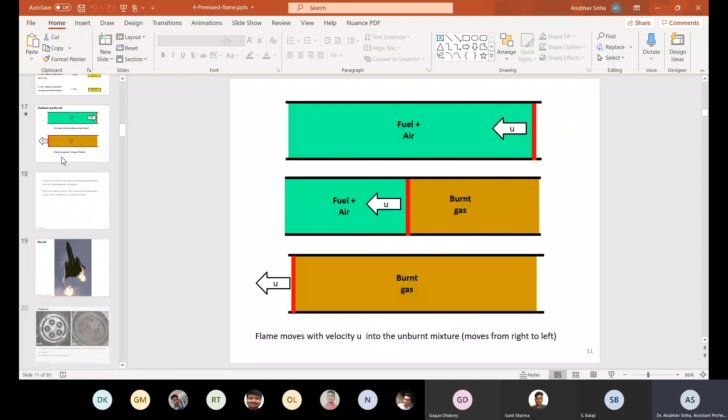Now let us go back to our premix flames. Just to review quickly, we have talked about what is the difference between premix and non-premix diffusion flames. We have looked into some videos, and flame structure I believe you all are clear with, right? Any question?

Laminar flame speed, we discussed Mallard and Le Chatelier's theories. This again I am giving you as an assignment, so if you have any doubt, please let me know.

I will give you an assignment that you derive this equation and write the assumptions. I will mail you all, but if you have any doubt, this is basically to make sure you understand this theory. This is a very important theory for premix flames, so it is more for you to understand. If you have any doubt, you can ask me. But I would like all of you to derive this on paper, and you can just have a look at this. This is what you have to write in your own words, don't just copy it blindly.

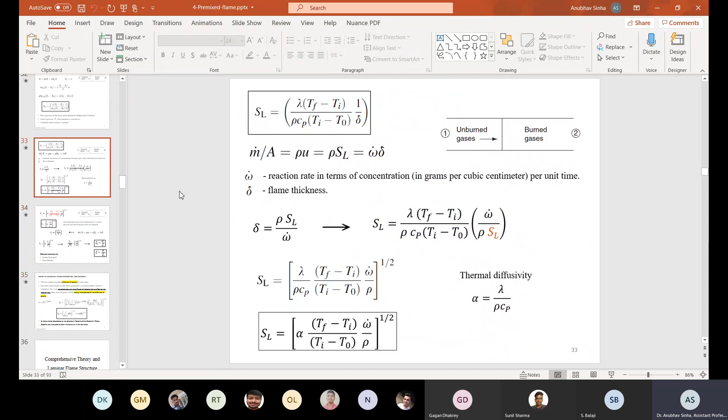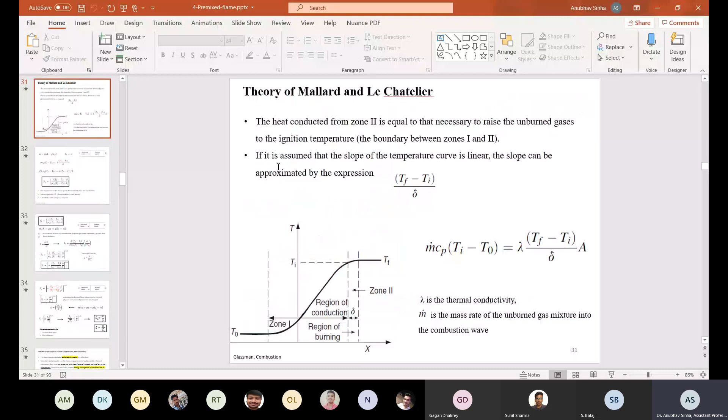So this, and one more collision theory that we have discussed in kinetics, these two I'm giving as assignments. You can take help from this lecture slides, everything is given here. You have to write what you understand. I will again put the instructions clearly when I give the assignment. So why I'm telling this, if you have any doubt, ask now, because you have to write this and submit it. If you don't have any doubt, then wonderful.

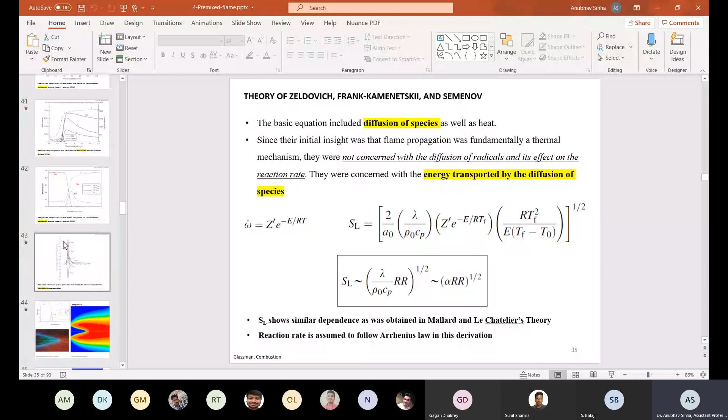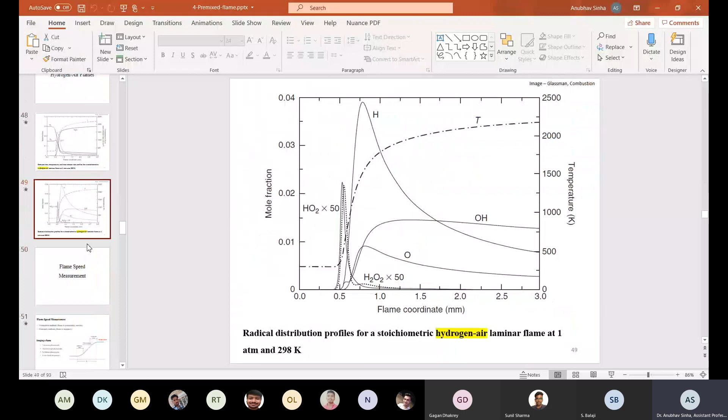We will go ahead. So we talked about flame structures, this all we have discussed, right? How flame looks, where are the major and minor species located, how temperature varies, how species varies. This hopefully you all are clear with. Now let us talk about flame speed measurements.

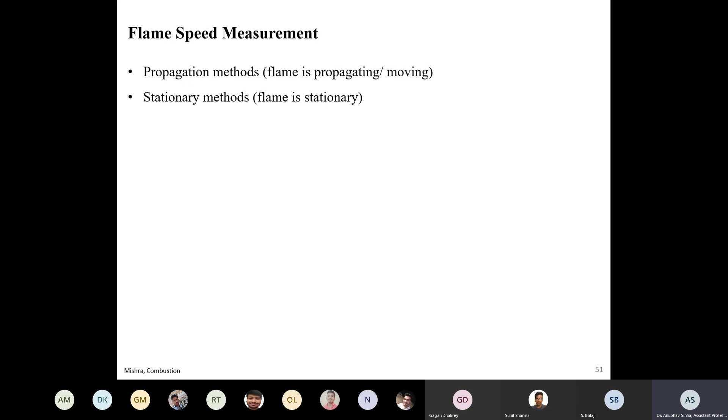Okay, let us then go to flame speed measurement. We have briefly spoken about this already. Now we'll go into a little detail and try to wind this up. So as I told, there are either propagation or stationary methods.

Then we look into how to take an image of the flame. Either you can do a simple luminous photography, where you're trying to capture the flame image using the light it is emitting, like normal photography, or you can take a shadowgraph or Schlieren.

I will talk very briefly about these two, and then there are laser-based diagnostics. We'll not go into detail, but this is a technique you should just be aware of, that we can do some laser-based diagnostics to find chemical species.

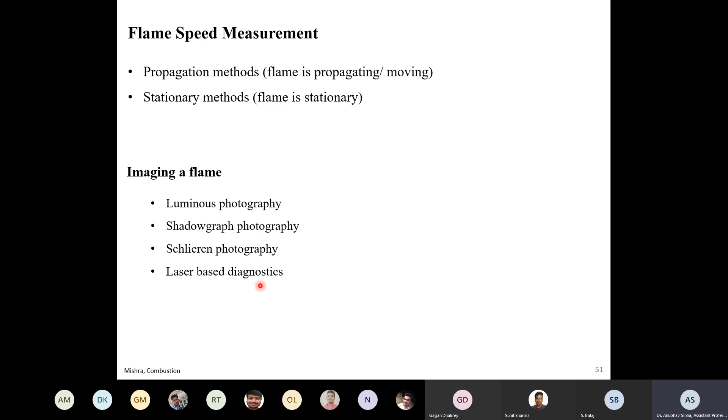But that will not make much of a difference because this flame thickness is roughly of the order of one millimeter or half a millimeter, so they're not very far apart. But since you're studying the subject, you should theoretically know where each part is.

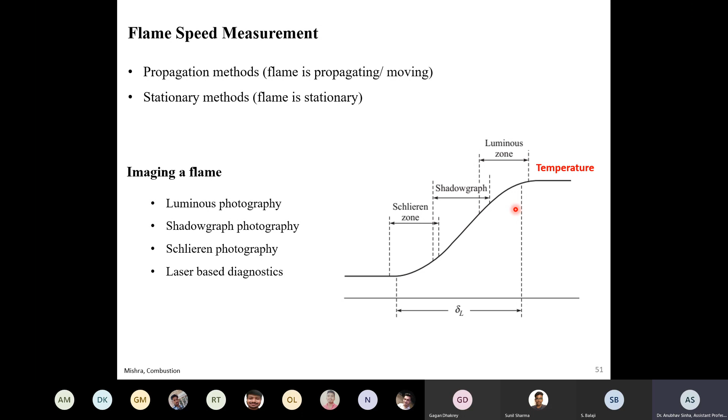Now let us briefly discuss what is this, what do I mean by Schlieren. Basically, in Schlieren or shadowgraphy, let us say you have a test section where you have a gradient change in this direction, a density gradient. So the density of air is changing in the y direction.

Because of that, if you have a light entering this region, it will get bent, either up or down, depending on how your density is varying. This happens because refractive index depends on the density of that medium, and because you have a density gradient, refractive index will also vary and light will bend. You have to study Snell's law, there's a lot of theory behind it—I'm just giving a brief overview.

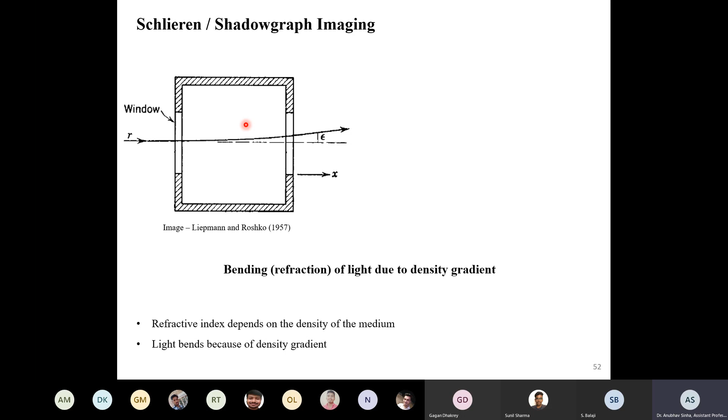What is the Schlieren image? If you want to do this experiment, you can use a simple water setup: water in a beaker or container, with some sugar solution, so the concentration is more at the bottom and less at the top. Because of this density gradient, you can see a laser pointer bending like this. Everyone can see this? Yes, sir. I will not go into the detailed derivation of how the technique works, but this is the brief background.

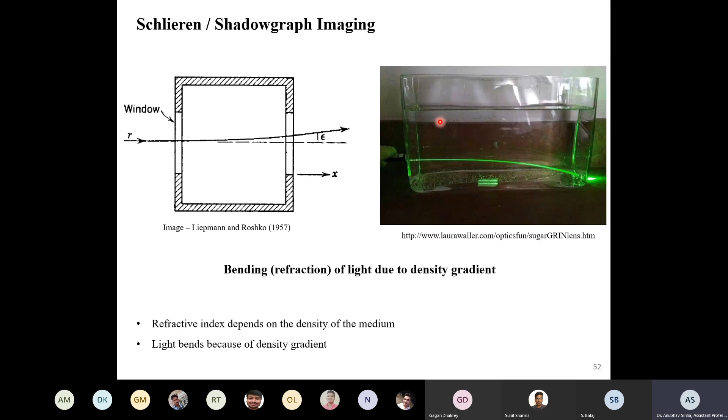This is the physics behind this method: light bends, and we use this bending to obtain Schlieren or shadowgraph imaging. Now, what is the difference? Schlieren basically depends on the gradient of density, the first derivative, whereas shadowgraphy depends on the second derivative, del square. How that affects things we'll not go into detail, but this is just a very brief outline.

And this is how you take the image—this is a Schlieren image. If you are interested to know more about these techniques, you can refer to these sites, go to Wikipedia, or this image I've taken from this website, from the Petersen Group at TAMU.

So what you see here is a spherical vessel, filled with an unburned premixed mixture. These are the igniters. Once you ignite, there is a flame front which grows with time. You capture how, at what rate this is increasing, and then you know what the flame speed is. This is a very good example of Schlieren photography—this is how a Schlieren image looks.

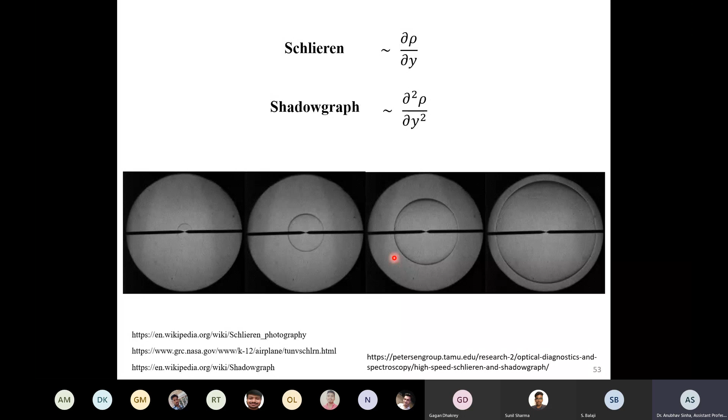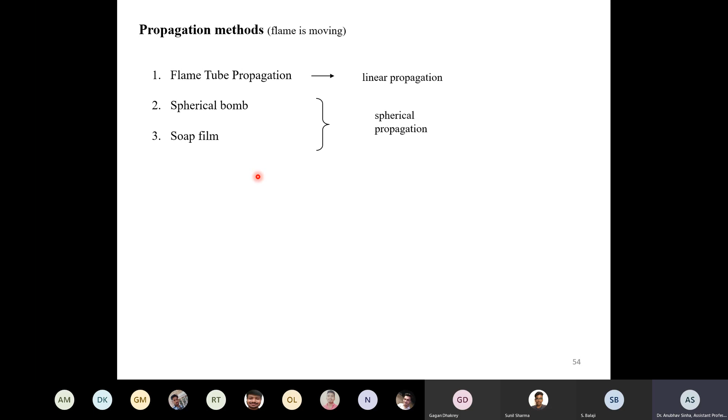Now we'll talk about what we've briefly discussed: flame tube propagation, spherical bomb, and soap film. We'll look into more detail now. Flame tube is, as I told, a linear propagation, and these two are spherical propagation. Can you see the top part, or is it hidden behind this presenting thing?

Can you all see this flame tube propagation? We can see till the heading, sir. Yes, sir, we can see that heading. You can see this part. For my case, one top bar is coming.

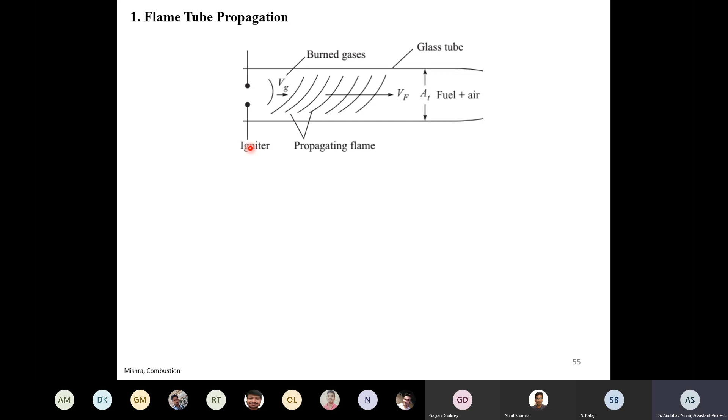Anyway, good. So this is a flame tube that we have already discussed, and I have written some limitations, you can read it. There is no much theory or explanation. Basically, ideally when we talk theoretically, we say that the flame front is a straight line and it moves normal to this direction. But in actual experiment, it gets bent because of various effects. One thing is that the velocity profile is parabolic, then there are some buoyancy effects. So because of all this, it is an approximate technique. This is not a very good method to measure flame speed.

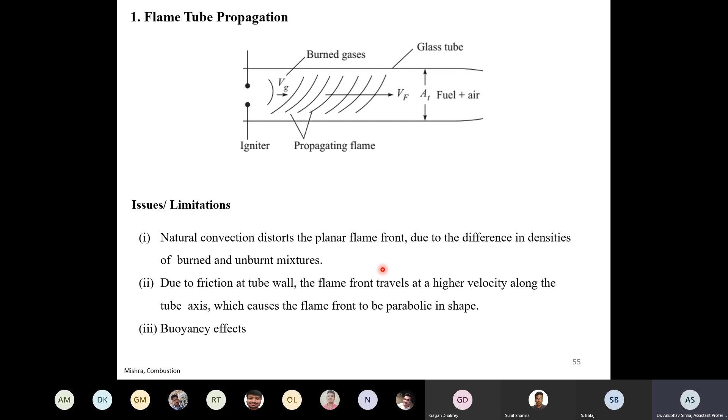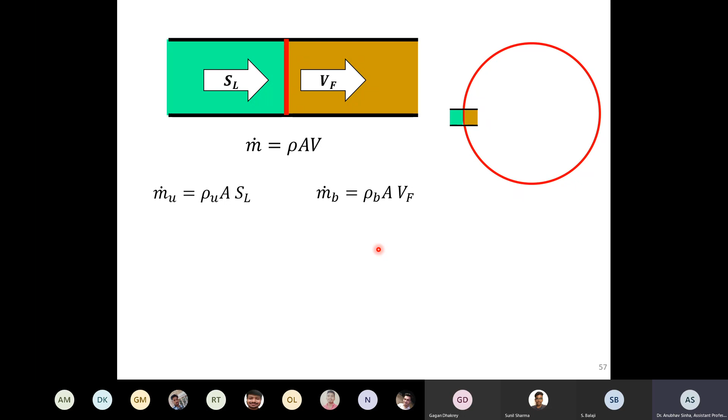So now for this coordinate, when I say that flame is stationary, mass conservation will hold good - mass conservation will be applicable. So I can say m dot is rho a v. Now let us have a look at m dot on the left side. For unburnt mixture, what is coming to the flame, I can say that m dot u is rho unburnt, area of this section, and SL, flame velocity. Whereas for the right hand side, for the burnt mixture, m dot burnt, what is leaving the flame front, is rho burnt, a, v - burnt density and velocity. Now since mass is conserved, what mass is coming to the flame, the same mass is leaving the flame. So I can say m dot u is equal to m dot b, and using that I come to this equation.

Now if I relate these two, I can say that SL can be represented like this. Basically I'm just sending this rho u to that side, A gets cancelled, rho u sent to that side, it will become rho b by rho u into Vf. Is this okay to everyone? Yes sir. Fine. Now this Vf is basically dr by dt - this is the rate at which the flame expands for a stationary observer. If I am standing outside, if I am not moving with the flame speed, then this is the dr by dt. So we can relate the flame speed by using the density ratio and the rate at which the flame front expands for a normal stationary observer. This is the basics of spherical flame expansion.

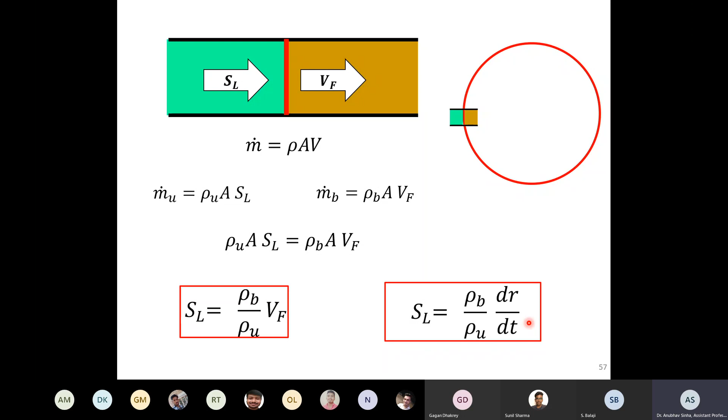So there are some limitations using this method. Pressure and temperature will increase when you have a large flame, when a large area is filled or the flame is going towards the wall. Initially this is good, there is not much increase in temperature and pressure, but initially the flame is distorted, having very large curvature, so that is also not good. So taking this flame speed measurement for very large flame or very small flame is not good. You have to take something in between. So that is one of the limitations of this method.

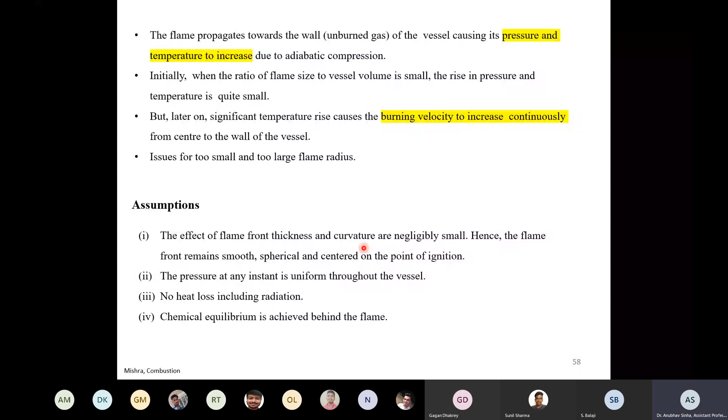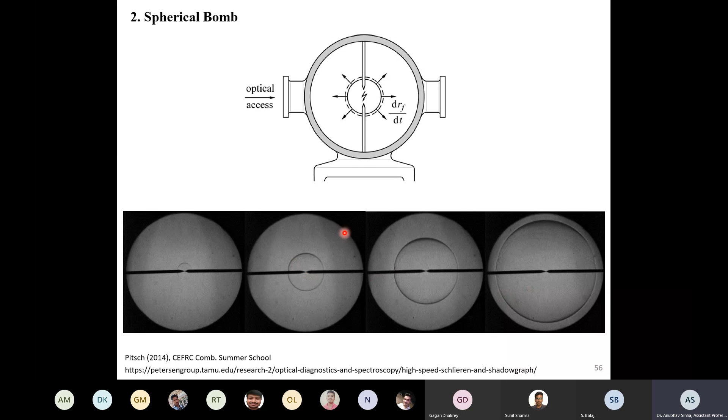Then one big assumption is that the pressure at any instant is uniform. That is in general true, unless you are having a very fast flame or detonation, which we have not studied. But for normal cases, this is a good assumption. Then no heat loss, that is also an assumption you need to be aware of. And you also assume that chemical equilibrium is achieved, which is also a reasonably good assumption.

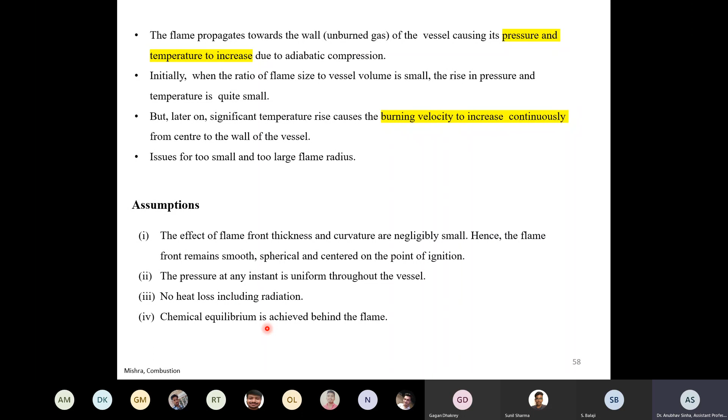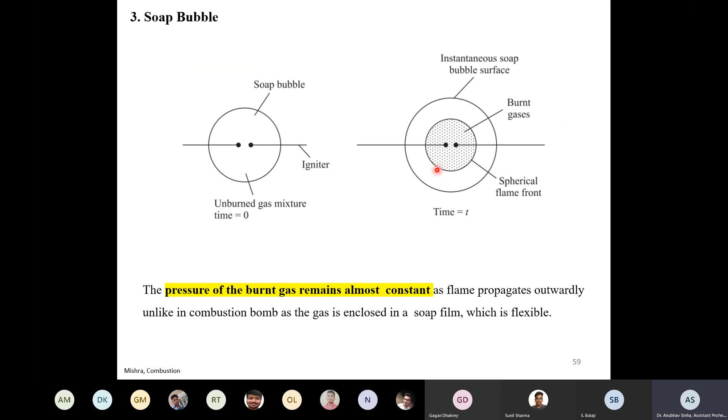So again, a very similar method is the soap bubble method. What happens in the bomb method is that you have a closed vessel and pressure increases with time. Now if you create a soap bubble, then you can maintain the pressure constant. The bubble will expand up to some point and then it will burst. So for a small period we can take flame speed measurement. But this method also has a lot of limitations.

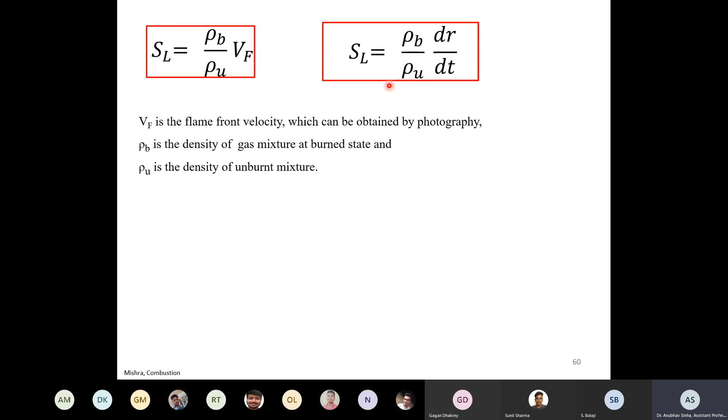So again we will use the same equation what we have used for the spherical bomb to measure the flame speed SL. But the limitation is that first you have to pass the mixture through a water solution, soap solution, so you cannot have a dry mixture, it will always have some moisture. Then when your bubble expands, it may not retain a perfectly spherical shape, it can become ellipsoid or something like that. And if you have a fast flame, the flame front will not be very smooth, so that is another concern with this method.

And heat loss, which is also there for the bomb method, is also an issue here. And again, it is not a simple task to create a bubble, it is a difficult or troublesome task when you want to create a bubble. So this is one method which you know for completion, but it is not a great method to follow.

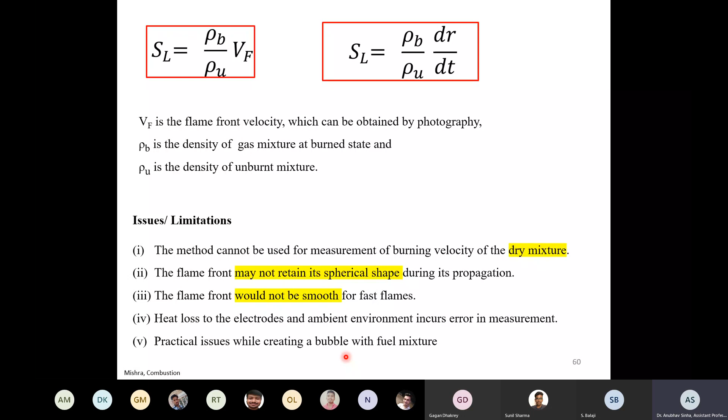So now let us look at stationary methods, which are much more simpler to use, and some, for example, the last one, is much more accurate. So let us have a look.

So one is a flame tube, which we have already discussed. You have a tube and you supply fuel in such a way that your velocity matches the flame speed. In that way we can maintain a stationary flame, and using this velocity I can say that this is my flame velocity, and that is how it can be measured. But again, it will be very difficult to create a stationary, stable and thin flame like this, which is very straight and not distorted. So theoretically it is a good method, but practically it is a little bit tricky and difficult to obtain a very flat flame using this. These are the limitations we have already mentioned.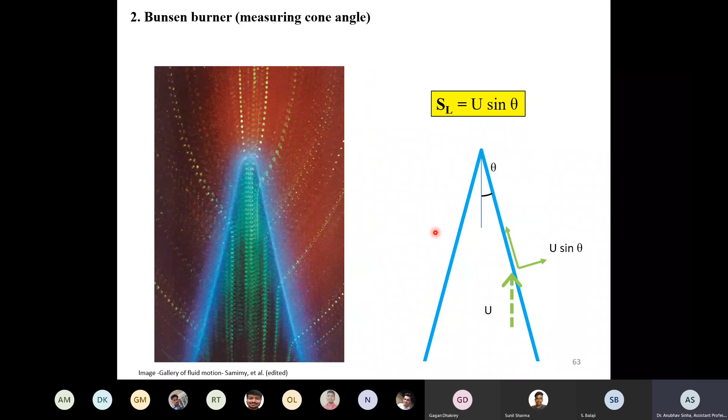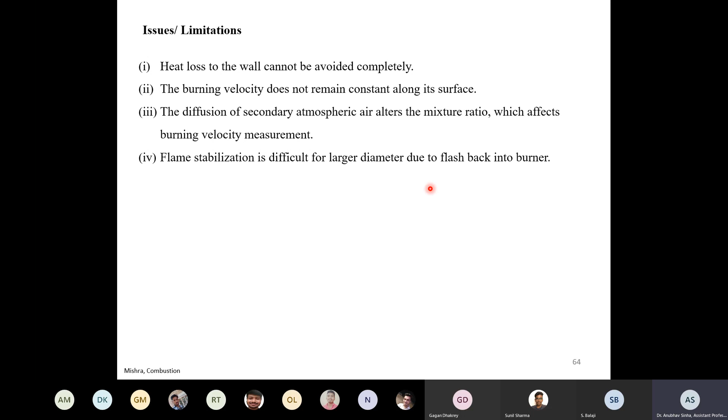Coming to the limitations, heat loss cannot be avoided. We assume burning velocity, but strictly speaking it is not true. For practical cases, this is a good assumption. Large diameter and all this we'll discuss. Flashback we have discussed briefly, but this is another topic, we'll take it maybe next week. So these are some of the issues associated with this Bunsen burner method.

Now let us talk about the last method, flat flame burner. This is one of the most accurate methods which you can use to measure flame speed. What we do here is basically we have a burner like this where we get a flat flame. I will show you photos how we get a flat flame, but this is how it looks.

What we do is we have a sintered metal disc here, and we have fuel air mixture coming from the bottom. This fuel air mixture enters here, and these are some flow conditioning apparatus. We'll have glass beads and steel wool. The function of this is to make the flow uniform, to reduce turbulence, to make very nice and uniform flow. And again the same thing will be done by the sintered disc.

This is a porous metal disc, I will show you some photos. Through this the flow passes. That gives a very flat or uniform velocity profile, because there will be a large delta P across this porous disc, and because of that we get a very nice flat flame here.

Now what we do in this method is we have a metal disc and we apply cooling here. Water tubes are there which cool this disc. Basically we are extracting heat from the flame. What we do is we take different rates of cooling and finally we extrapolate that to zero cooling for adiabatic.

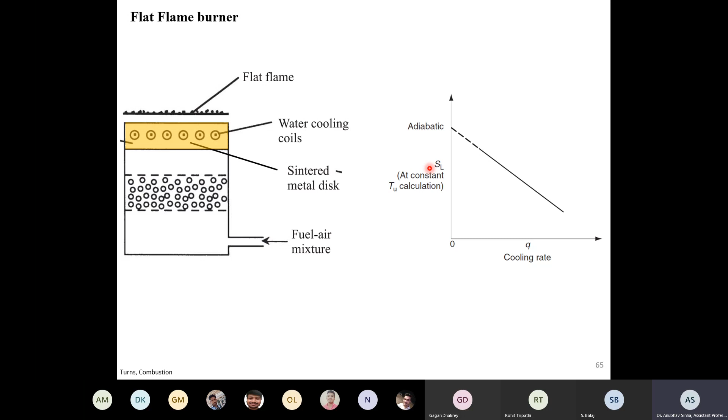Flame speed is basically defined for an adiabatic flame where there is no cooling at all. So we use different cooling methods and then we go back to adiabatic, and this is how we define flame speed measurement SL, for different rates of cooling, and what I already just spoke.

So let us look at the photos. A student asks whether flame speed and cooling rate vary linearly. Yes, that is an assumption, mostly it will be linear. There is actually one very important question that no one is asking, that we'll come to.

Anyway, this is how the actual burner looks. I've taken this from a McKenna burner. They have some copyright on flatflame.com, what you see. You can go to this website to look at more of the designs.

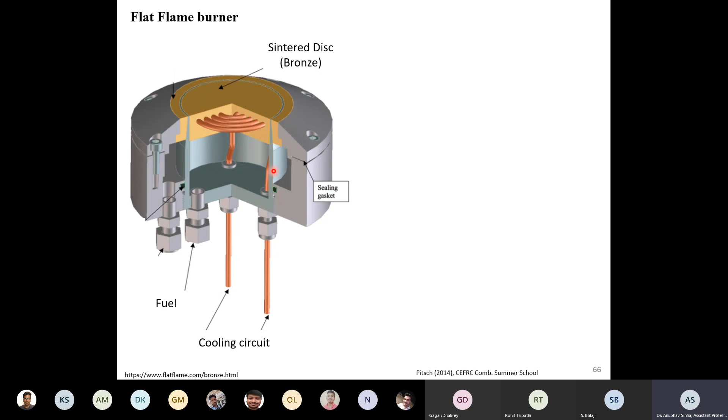So how does it look: this is your sintered metal disc, I have a photo also. This is your metal disc, made of bronze, and it has very small porous holes, maybe of the order of 20 micron, 40 micron. Because of that, there is a large delta P and we get a very nice uniform velocity profile.

These are the tubes you can see inside this, which will pass water. Water enters from one tube and then it is circulated inside it, and then the hot water comes out through another tube. This is your sintered disc, as you can see here. This is your cooling circuit, and here the fuel enters.

Fuel enters from here, and it basically has a slightly higher pressure than atmospheric, and then it diffuses, it just goes out through this porous disc. Let me draw: the fuel comes out like this through this porous disc, and then it forms a flame which looks like this. Can you see, this is a very nice flat flame, and this is one of the most accurate or idealized methods which we utilize for flame speed measurement. And when you go for laser diagnostics, this is a very standard burner used to calibrate your laser instruments.

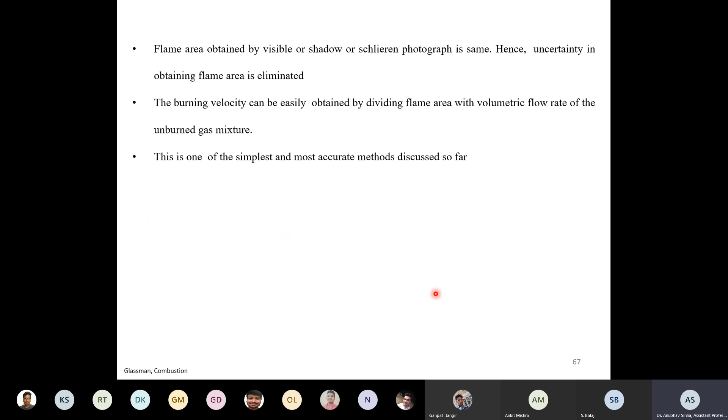And this was actually the last photo I took with that burner. After that, the burner melted. So if you have a porous plug like this, a bronze disc, and if you don't have cooling, this is going to melt after some time.

So that is why cooling is needed. Then why don't we use metals with high melting point? Yes, correct, we can, but that will be more costly. That is the only concern.

So we have adiabatic burners also, like steel burners where we have a steel plug, and there are some other metals also. For those burners we don't need water cooling, that can be eliminated. But this is the most general method.

And with cooling you can actually make it more accurate. Once that burner gets heated up, we don't know what temperature it is, so accuracy is not very good. But if you have cooling, you can accurately extrapolate.

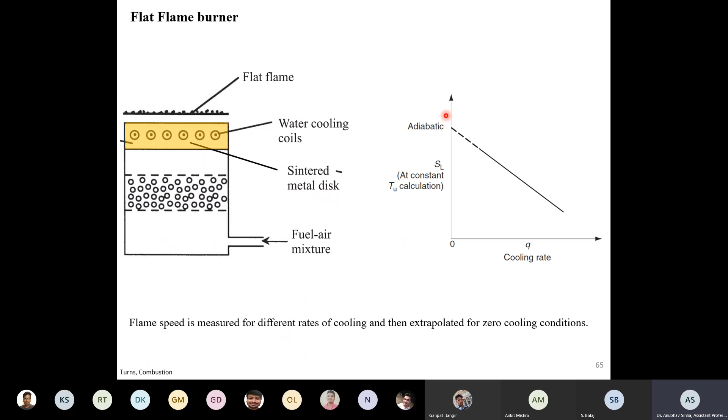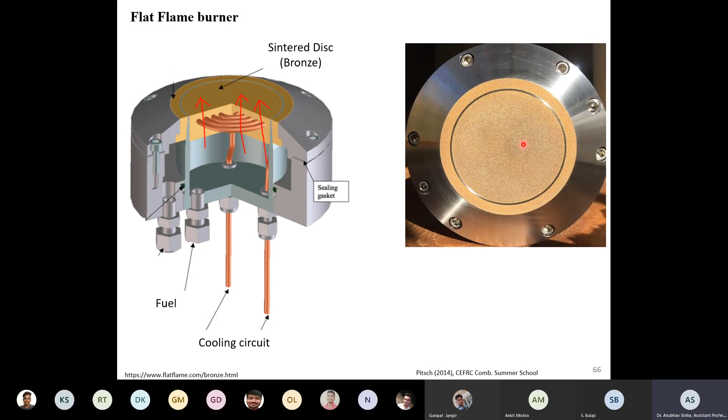That is one point. We have straight tubes instead of porous burners, of different metals, but that does not give a very uniform flame. There are also steel burners sold elsewhere, which should give good results, but they are very costly because sinter disc production is costly. This method is found to be more accurate. By this extrapolation, you get a very accurate flame speed. That is the idea.

Okay, so now let us go to the last part of this chapter. That also we have discussed, we'll just go into more detail. I've added some more plots. So let us see: laminar burning velocity is very important for premixed flames.

And it is difficult to achieve idealized conditions. There are, for example, the last method is the most accurate, so we'll see what are the techniques and...

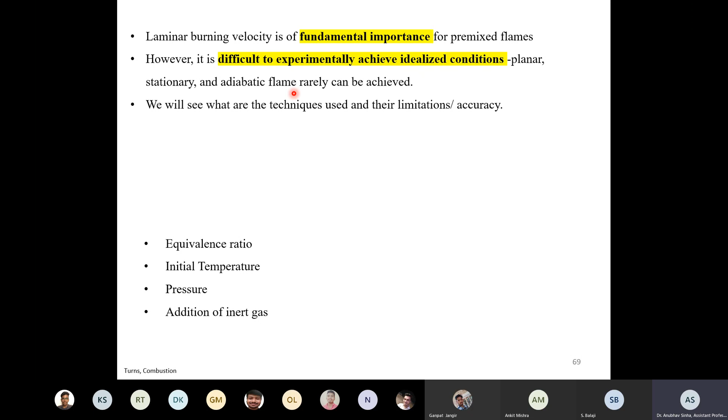Okay, so this is just to summarize. These are the different factors. We talked about different ways we have measured, the practical issues, and the limitations. Now we'll see what are the factors that affect your flame speed.

So this is one equation that has been derived. I'm not going into the derivation, but this is an empirical fit, and you can see what are the various parameters on which flame speed depends. Definitely it depends on temperature, it also depends on pressure, and it also depends on energy of activation. But this basically tells you the dependence on fuel type, which determines your EA.

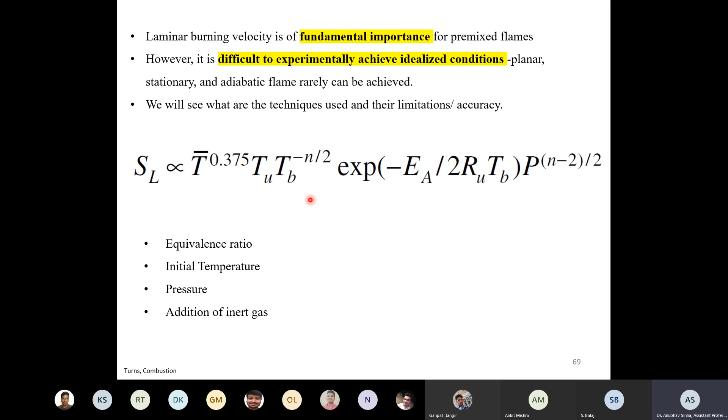So we talked that this will also be linked to equivalence ratio. We'll talk about equivalence ratio, initial temperature, pressure, and addition of inert gas. This will affect your final temperature. Okay, so let us have a look.

Now, before we go to the dependence on flame velocity, we also need to look at how flame temperature is affected, how equivalence ratio affects flame temperature. So this plot shows equivalence ratio on the x-axis and adiabatic flame temperature on the y-axis. What you see is that for roughly equivalence ratio 1 or 1.1, we get the peak temperature, T max, and then the temperature drops for lean or rich conditions.

Is this fine? Everyone is, I think we have discussed this, right? Yes, sir.

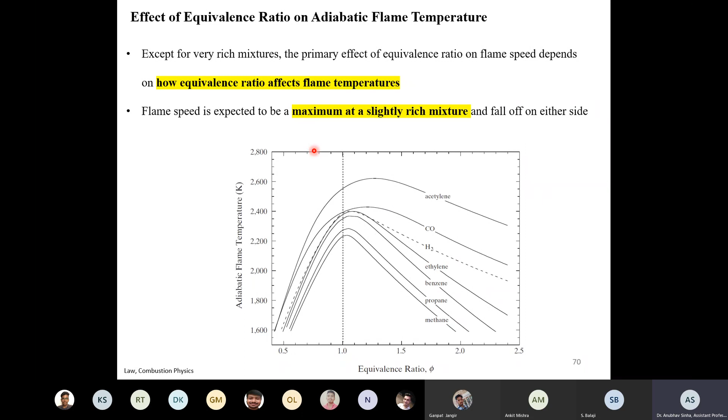We see maximum temperature near the stoichiometric ratio, roughly around phi equals 1.1. This is the line, and for other conditions we see a drop. That is what controls your final temperature, and that will again affect your flame speed. This also affects your flame thickness. So this plot is for flame thickness, and you see this is like the reverse of flame speed. So for equivalence ratio 1, we have the thinnest flame, right?

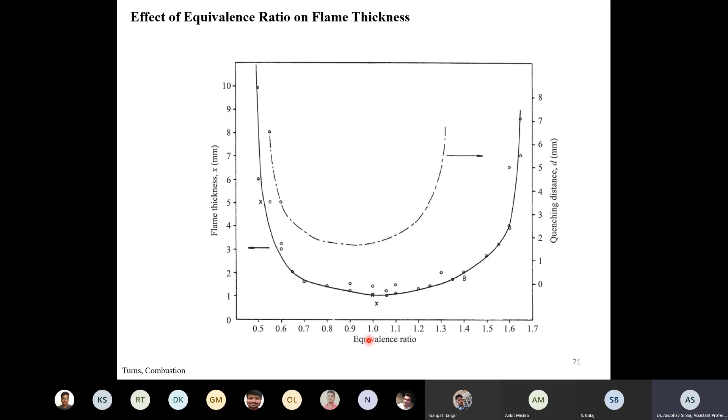We have already discussed this delta. This delta is inversely proportional to SL. So SL is maximum here, so this is minimum, right?

Now let us go to the effect on flame speed SL. The same effect that equivalence ratio has on temperature, a similar type of effect is also visible on flame speed. So for equivalence ratio 1, we get the maximum flame speed and then it drops. We have already discussed this, right? And this is for alkanes which are very close.

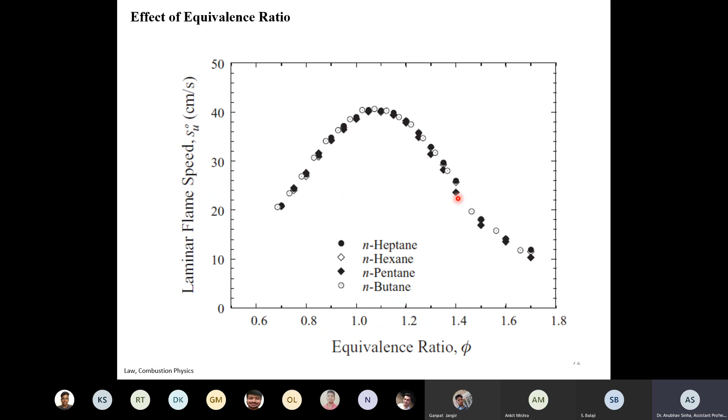Yes sir, this y-axis shows adiabatic flame temperature. So if you calculate, you basically need to look into the bond energies - what are the bond energies of reactant and product - and using that you can calculate adiabatic flame temperature. That is the idea. So if you look at CH4 bonds, CO2 bonds and water bonds, using that methane is calculated. Now here we also have CC bonds - for all other hydrocarbons listed here except methane, we have CC bonds also. So there is a detailed calculation, but this comes straight away from that. No other complicated thing - this is just based on difference in bond energy.

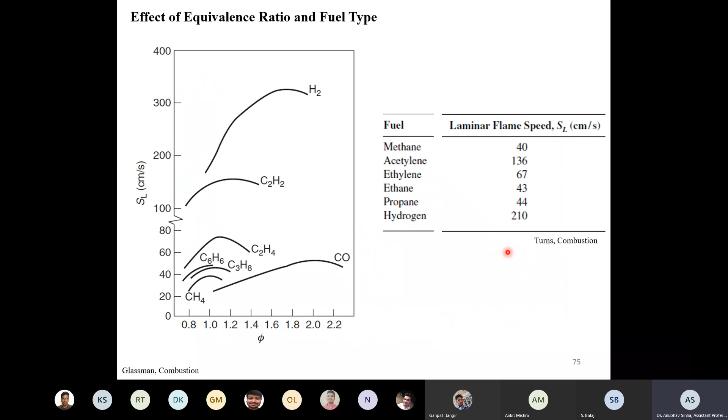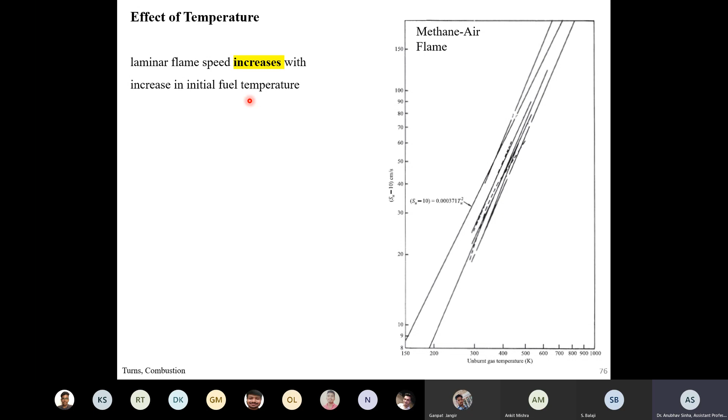Everyone is clear with this? Yes, sir.

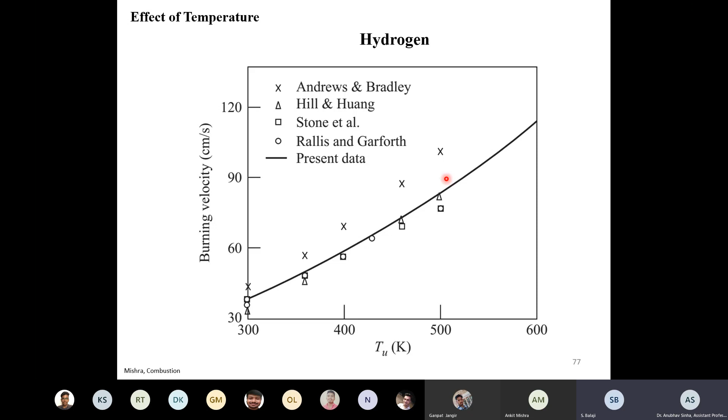Now when we see the increase of flame temperature, the flame speed would generally follow the same trend, but instead it follows a reverse trend. This is one peculiar thing about pressure: flame speed is decreasing with pressure. We see this in multiple measurements, everywhere flame speed is decreasing. So can anyone explain this? We discussed this previously: temperature is increasing with pressure, but flame speed is dropping. Why is that so?

Flame speed will drop due to reaction rate becoming lesser, right, sir? No, because of more mass.

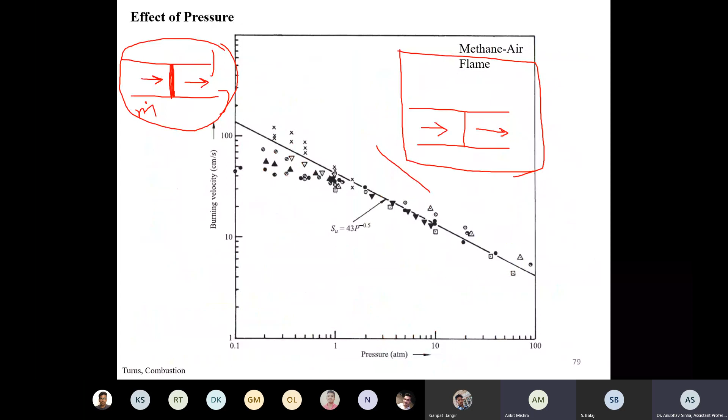Sir, I am saying in the previous diagram, the CH4 is following some different trend. Which diagram? This one. No sir, just forward it. This one, sir. Yes, sir.

See, this is for laminar flame speed. Left side is for flame speed, right side is for burning flux. See, your SU is decreasing, right? But what is flux? Flux is defined as rho U, or let us say rho SL. So F, flux, is rho into SL.

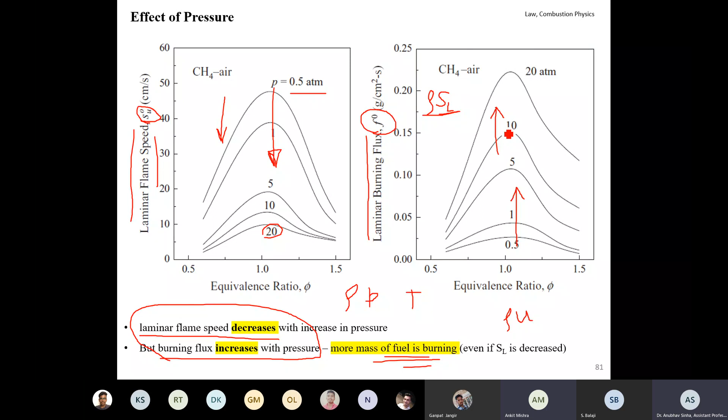So SL is decreasing, but rho is also increasing with pressure. So this whole term, rho SL, increases with pressure. That is the idea. Fine, is everyone clear with this?

Okay, moving on, let us look at effect of inert gas. So what happens here is, you see, this is N2. N2 is basically, let us say this is air. We are talking about inert gas other than fuel and oxygen. So let us say I have fuel plus oxygen plus inert gas, that is the reactant. That is how we start with. So if I have nitrogen instead of inert gas, then it becomes air, right?

Now if in air I replace nitrogen by argon, the curve will look like this. The flame velocity, burning velocity, will increase. And similarly, if I have helium instead of argon, it will increase further, right? So let us have a look.

Again, I will say that I am showing plots for CH4. This is the simplest hydrocarbon, but the discussion is general. I will not show plots for all other fuels, propane, butane, but the same trend applies to all of them in general. There could be some exceptions that we can discuss, but what generally we observe for CH4 is also true for other fuels. Don't think that this is only for CH4.

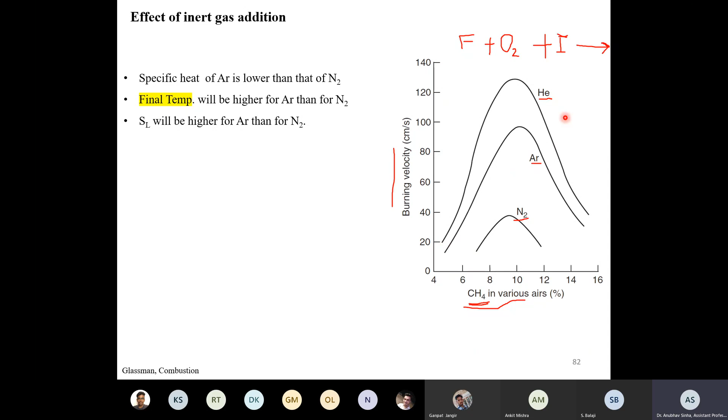Now what about helium? Argon and helium have the same specific heat, and the final temperature is also equal. So why do we see a difference here? Thermal diffusivity alpha of helium is much more than alpha of argon. So that also plays a role.

Because of this, as you remember, for Le Chatelier we derived the flame equation. Do you want me to go back, or do you remember that? Does anyone remember this equation, or should I go back?

Okay, let me go back. You people are listening or not? Yes, sir. Yes, Yes. sir. Okay, Yes, sir. I will Yes, sir. think that I have gone offline. Okay, let me go back to Le Chatelier so that it will be more clear.

Let me go back to Le Chatelier so that it will be more clear. We derived some equation for flame. So we derived that SL is proportional to alpha. Remember this?

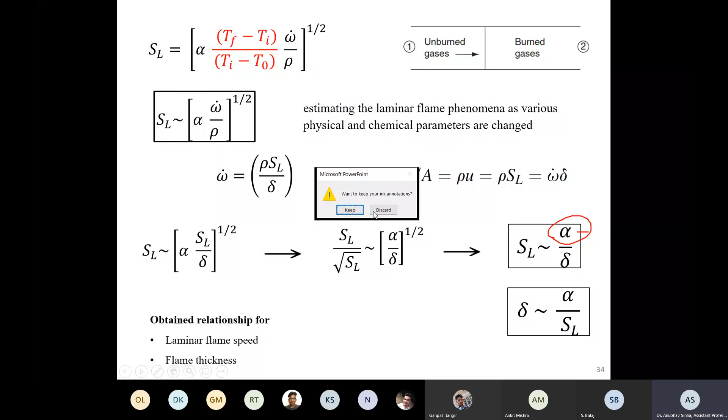Now this is the final relation we derived. Remember, SL is dependent on alpha? So now let me go back to that slide.

Okay, we are running out of time. I will take 5-10 minutes more. You have any class after this, or should we stop? No, sir. Okay, so let No, me. sir. We'll take 5-10 minutes more, and we'll finish this premix flame today.

So we have seen that alpha also controls your flame speed. So now I can say that although helium and argon have the same flame temperature, so they should have the same curve, but we have different alpha, so we get different curves. So for inert gas, you can see that this is the trend: nitrogen, then argon, then helium.

Is this clear to everyone? How your burning velocity varies with inert gas? Yes. Yes, Sir, sir. yes, sir.

What will be the effect on pressure if we are adding inert gas? I am talking about atmospheric cases, the pressure is not increased. So what I am saying is, in air you remove nitrogen, you fill argon. So when I supply premix flame, instead of air I have argon. Pressure cannot, it's not like pressurizing it more with argon. We are replacing nitrogen with argon, that is the idea.

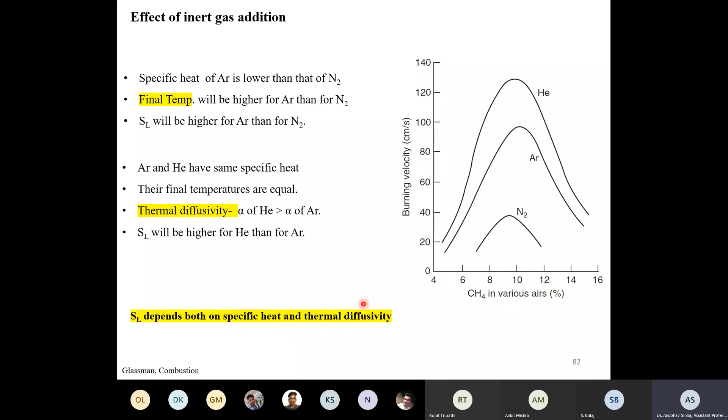So the conclusion is that flame speed depends on both specific heat as well as alpha. Now let us just summarize. So for all these slides, this is the conclusion. This is a very important table.

What it says is for equivalence ratio, SL is max for stoichiometric. This is the type of curve we are drawing, and we say that this is stoichiometric. So SL is maximum for stoichiometric, it decreases both for rich and lean. This is the lean side, it decreases for lean, it again decreases for rich. This is the general trend we see for most fuels.

And flame thickness is following the opposite trend, it looks like this. Now temperature, SL increases with temperature. This is very obvious.

Now pressure, this is a little bit tricky, so just pay some attention. SL decreases with increase in pressure, but the rate of burning flux, rho into SL, this is increasing. Rho SL is increasing, whereas SL is decreasing, SL is decreasing, density is increasing, so the overall term is increasing.

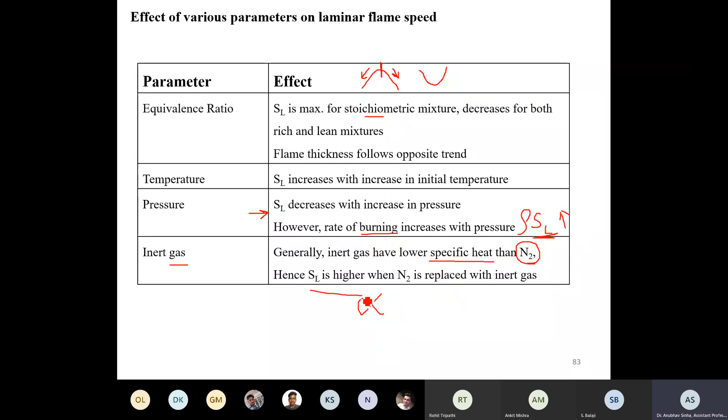Now let us go to turbulent premixed flames. This is actually a separate topic in itself. We'll just briefly look at what this is. There are different books on turbulent flames, so we cannot discuss this in detail for this course. We'll not go into a lot of detail, but you should know what a turbulent flame is and how flame speed varies. That is what I will cover in the next 4-5 slides.

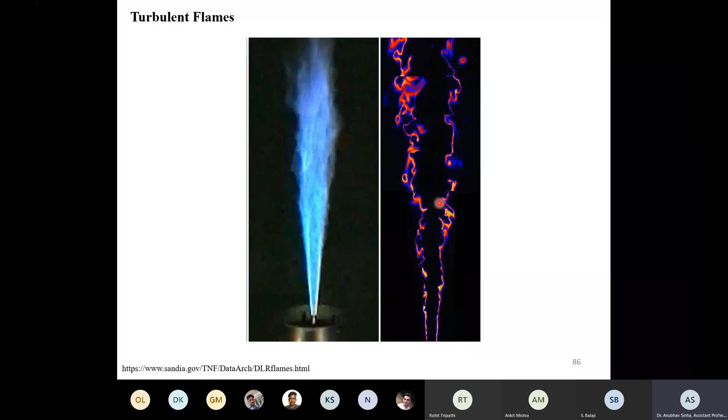So this is a premixed flame. You see low turbulence, this is irregular, but if you increase the level of turbulence or turbulence intensity, the irregularity increases more. We get very small scales. So what will happen to the flame surface because of that?

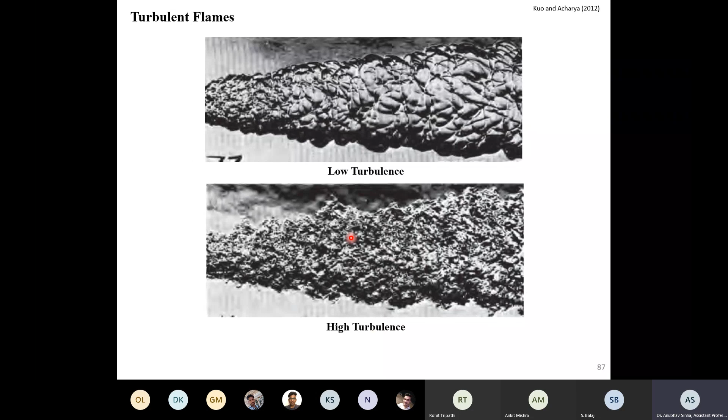Any guess? We have a flame surface, right? This is a flame surface. This bright white light is the flame surface, which is very smooth here. Now if we make it zigzag, let us draw it here. If I make it corrugated, what will happen to the flame surface? It becomes turbulent. Can you see it?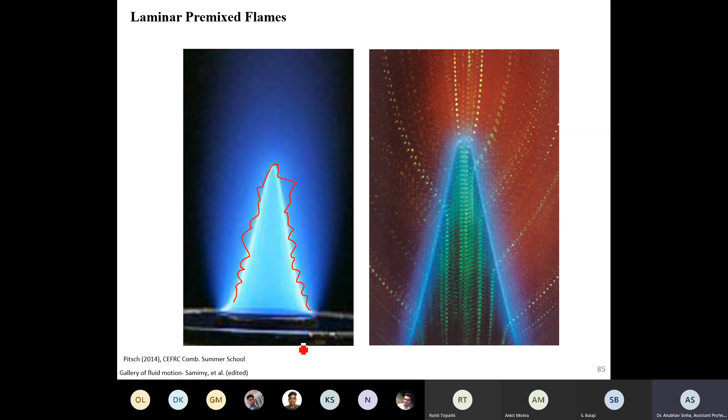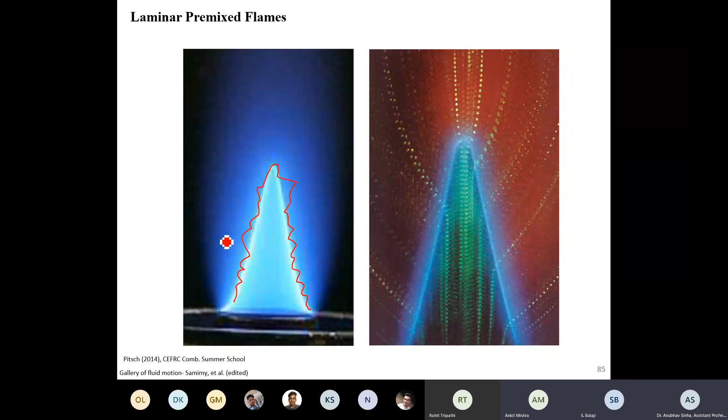Anyone would like to guess what is the difference between laminar and turbulent? You people are connected or what happened? It will be irregular in shape. So the flame surface, let us talk about the flame surface area, that is what I am concerned with. Will flame surface area increase or decrease? Increase. Very good, increase.

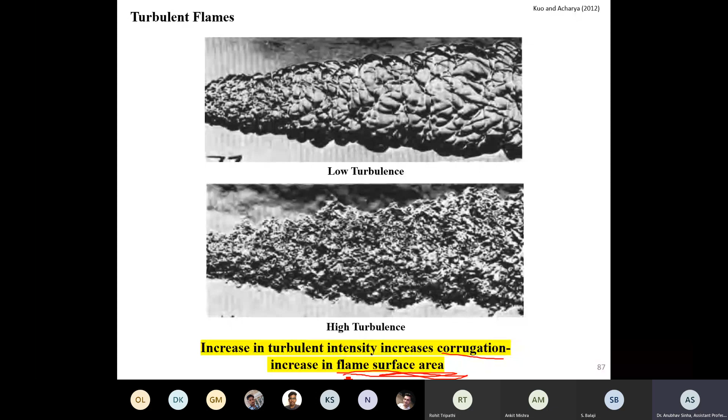So turbulence increases your corrugation, which increases the flame surface area. That is the most important effect of turbulence. There are a lot of other things, but let us talk about the simplest case that we have discussed all along.

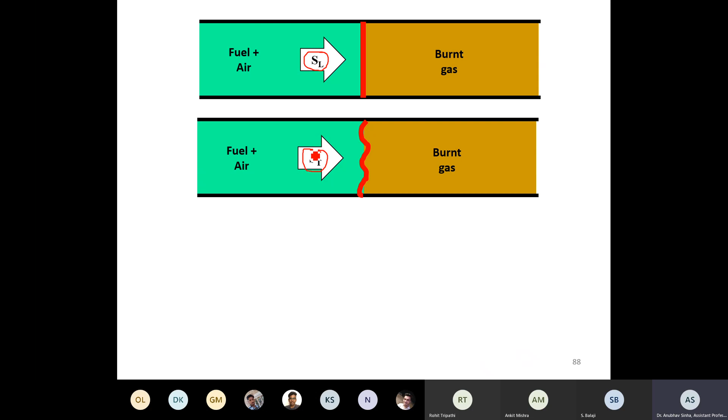So in a tube, if you increase the flame surface area, this is SL, the laminar flame speed, and this is the turbulent flame speed, ST. So will this be more or less? Can I say that turbulent flame speed will be more than laminar flame speed? Yes, sir.

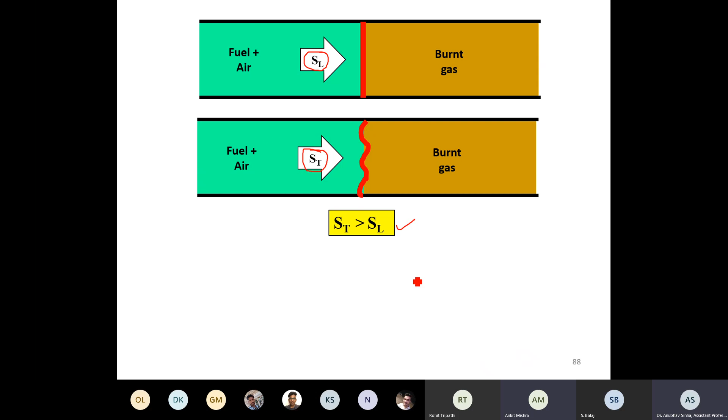So basically there are a lot of things going on, I cannot go into detail. Turbulent combustion is like a topic for research, but it increases— turbulence increases your flame surface area. Turbulence also affects and alters chemistry to a large extent, but we will not talk about that. This is what we see though.

So let me give you a simple analogy. Let us say that this tube is of diameter d. So let us say I have another tube of diameter 2d. Now let us say that this is a laminar flame. Everyone is listening, or you have disconnected? Yes, sir. Okay, so this is, let us talk about a laminar flame.

Forget about turbulence, I am just trying to explain how increasing area gives you more flame speed. So let me draw this again. This is actually a very important concept, so I want everyone to be very clear with this. Let us say that we have a tube with diameter d. Now I made another tube with diameter 2d, let us say, or let us say that the height is 2d.

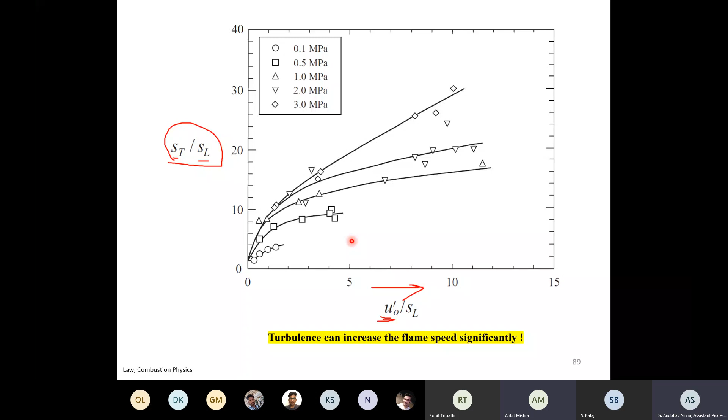Sir, why is the term 'general' used then? In the first slide you used 'general' - in general, ST is greater than SL. Is it true for every case? So this is the general trend, not true for all cases, but in some cases turbulence could also extinguish the flame. If you have a lot of turbulence, the flame is gone. So in general, under normal conditions, if you have a flame, ST will be more than SL - that is always true.

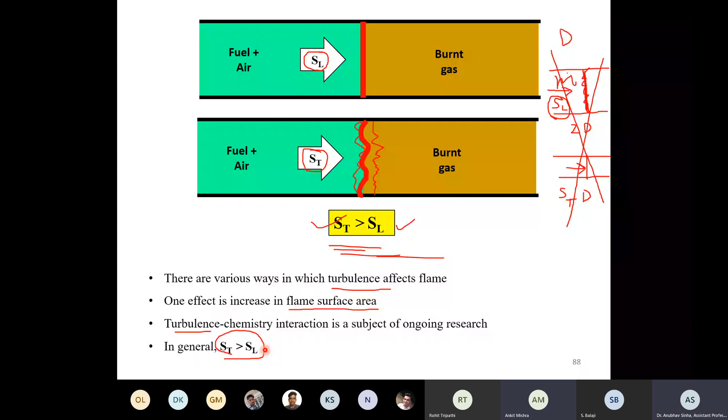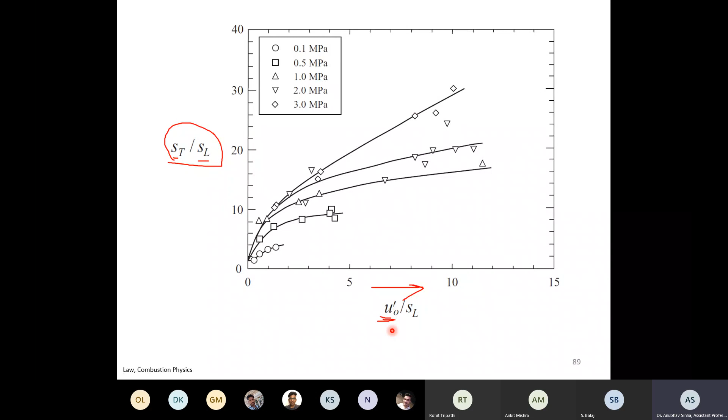So this is what we see, that turbulent flame speed increases with the level of intensity of turbulence. That is what this slide is showing.

So there's one last slide I want to discuss. There's one number which is very important for turbulent combustion, called the Damkohler number. This is basically the ratio of turbulent mixing time scale and chemical reaction time, how much time the reaction takes. So these time scales we define like this.

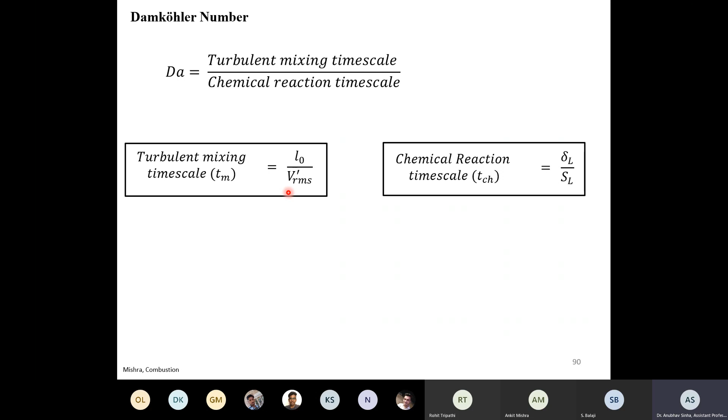So for turbulent mixing, this is L0, the size of an eddy or any characteristic length, and this is the RMS fluctuation of velocity. We will not go into a lot of detail, but this is how we define the mixing scale or turbulent time scale. And the chemical reaction scale is straightforward.

Chemical reaction happens along a flame front. We are burning fuel using this. The thickness of this is delta, and the speed at which the fuel comes is SL. So this is speed and this is length, which gives you a time scale. Here also we are using speed or velocity and this is a length scale, so that gives you a time scale.

So these are the two important time scales used for turbulent flames, and then we get the definition of the Damkohler number: mixing or turbulent time scale divided by chemical time scale, which can be written like this. This is the Damkohler number definition - just a definition, no complex thing here. Is everyone okay with that? What is the Damkohler number?

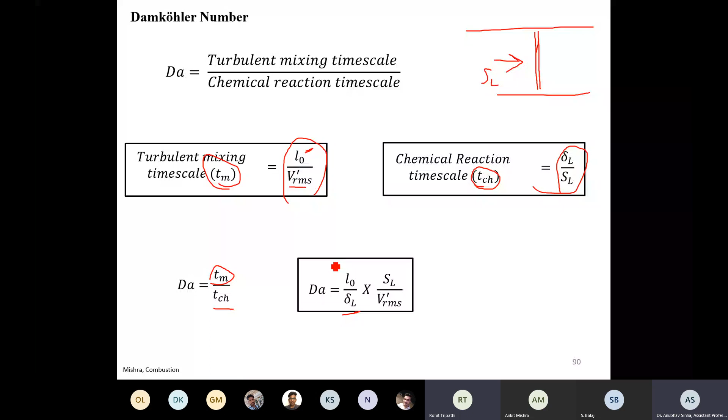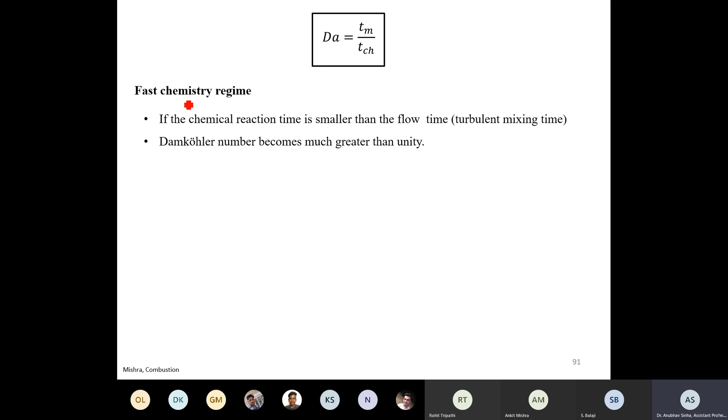Let us finish. So basically for the Damkohler number, we have two regimes: one is the fast chemistry regime. When the chemical reaction is very fast, the chemical time scale is very small, so this is small and this is large. So what will happen to the Damkohler number - will it be more than 1 or less than 1?

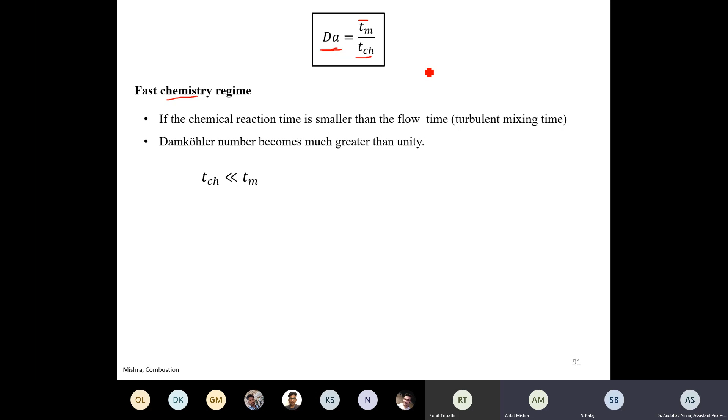I have already written this, so it will be more than 1. Similarly, we have the fast mixing regime where mixing is much faster, so reaction time is more and mixing time is small, and the Damkohler number becomes less than 1. So these are the two regimes for turbulent flame: fast chemistry and fast mixing. This is defined based on whether the Damkohler number is more than 1 or less than 1 - we define two regimes for turbulent flow.

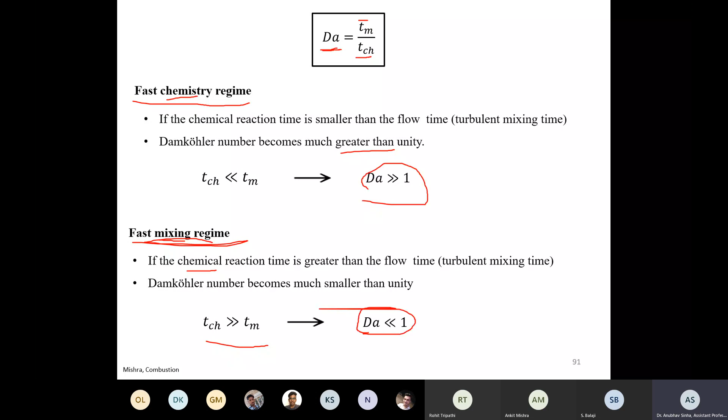That is all we are going to discuss about turbulent combustion. Is everyone okay with this, or any confusion? Okay, let us stop here.